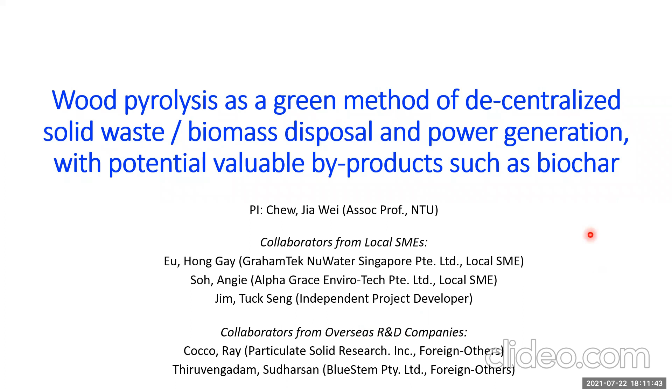The differentiating factor for this proposal is the local context that we are very aligned with. So Singapore aims at net zero emissions in a few decades, and the solutions that we develop have to be fully aligned with Singapore's unique context. The specific problem we are targeting that is unique to Singapore is solid waste disposal.

So Singapore is a very, very densely populated country. We generate 8,000 tons of solid waste daily. Of these, 40% is incinerated, and the incineration is to reduce the volume by 90% and also to generate power. The problem with such a method is that it gives substantial carbon emissions.

To circumvent that and to be aligned with the current grant call on low carbon emissions, we are targeting this specific problem of wood. So Singapore's green city status requires regular tree pruning, and this gives 1,000 tons of waste wood daily. So as a low carbon alternative to incineration, rather than incinerating this 1,000 tons of waste wood daily, we can pyrolyze these wood chips to generate decentralized power and biochar for agricultural use.

And why pyrolysis? Because it's the most economically viable compared to gasification, biochemical conversion, and various other means. This technology that we developed is also applicable to the substantial waste and sludges from the flourishing pharmaceutical industries in Singapore.

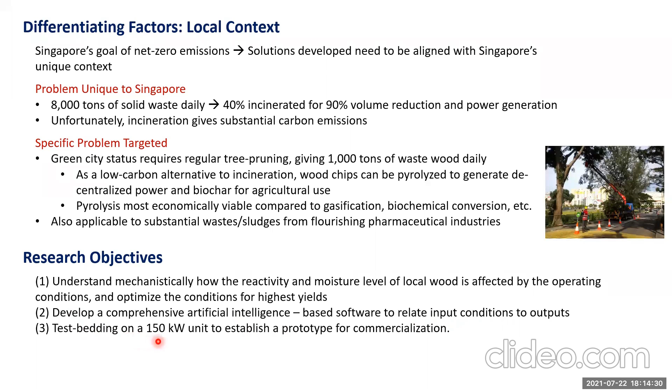accordingly. The third objective is to test bed this technology on a 150 kilowatt unit to establish a prototype for subsequent commercialization post-project. And how is this significant to the current grant call objective?

So Singapore is the world's third most densely populated country. So an efficient low carbon system for waste management is critical. The current method of waste to energy incineration results in substantial carbon emissions, so it's not sustainable. And to circumvent this, the reduction of the incinerated volume is necessary.

And part of this incinerated volume is this wood waste that is generated daily due to this regular tree pruning that we have to do to maintain our garden city status. This tree pruning gives 1,000 tons of solid waste daily. So what this project aims to do is to dispose of this solid wood waste by pyrolysis, and this not only reduces the solid waste that we have to feed into the incinerator, but it also generates decentralized power and also provides biochar for agricultural purposes.

So why pyrolysis? Pyrolysis might sound like an energetically expensive process, but it's been reported that 18% of the power generated is sufficient to satisfy the pyrolysis energy requirement, and the yield is very high. It's very attractive. For 1 ton of wood that we pyrolyze, we can get up to 300 kg of biochar.

And so compared to incineration, pyrolysis gives higher energy recovery efficiency, lower environmental pollutant emissions, and excellent flexibility for decentralized applications. And then compared to gasification and biochemical conversion, pyrolysis requires the lowest capital and operating costs.

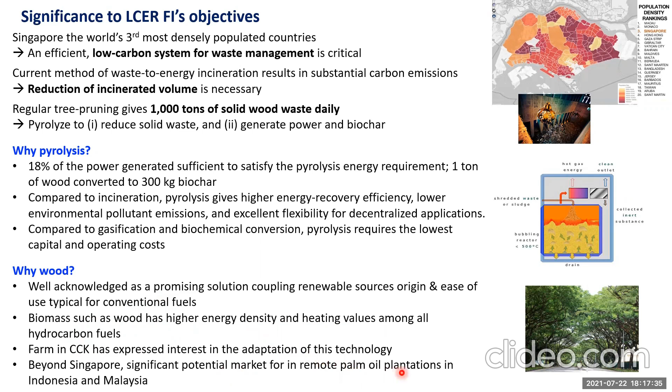And a farm in Choa Chu Kang has expressed interest in the adaptation of this technology. We'll elaborate more on this later on. And then beyond Singapore, in our neighboring countries, there's a significant potential market in the remote palm oil plantations in, for example, Indonesia and Malaysia.

So this is the plan for this proposed project. We are very aware that the need is to reduce the solid waste that we feed into the incinerators because this has a very high carbon footprint. And the solid waste that we are targeting in this proposed project is wood. This is a biomass, and this is a substantial constituent of the solid waste. But the economics of wood pyrolysis for valuable products remains poor. And so this is the challenge that we are resolving in this proposed project.

So under work package 1, we'll try to fundamentally and mechanistically understand via experiments and simulations how this wood pyrolysis process is. So we'll run experiments to try to understand the influence of various parameters. We'll characterize our local wood sources. And then for simulations, we'll carry out multi-scale simulations from the particle scale to the mesoscale to the reactor scale so that we can apply the knowledge gained to the commercial process.

Under work package 2, we aim to use artificial intelligence tools to improve the predictive capability of yield based on the inputs. So we know that the wood quality and variety may not be consistent on a daily basis. So we'll have to be able to troubleshoot and be able to predict how much power, how much biochar we are able to get out of the wood that we feed into the pyrolysis reactor.

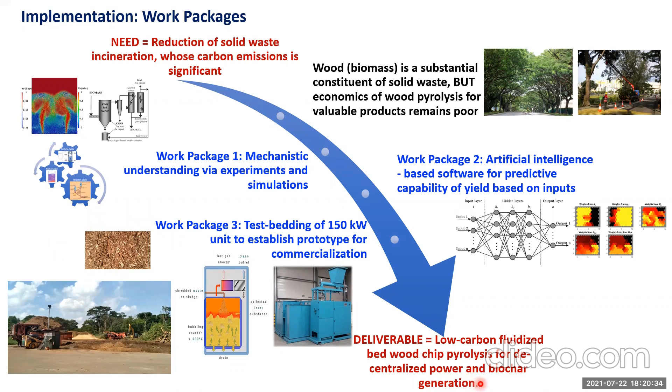So more specifically on the test bedding, a Choa Chu Kang farm, which is a contact of one of our collaborators, they've promised to supply us 30 tons per day of wood chips, and they will shred it down for us so that it's easier to feed into our pilot setup. And they've also offered to give us the land space, roughly about 4 of these 40-footer containers, so that we can house this pilot scale reactor that a Belgian contractor will build for us.

So this pilot unit will comprise of a fluidised bed furnace and associated blower machinery, secondary combustion chamber and boiler unit, flue gas cleaning plant and fan, turbine generator unit and condenser, and electrical switch gear and load bank. So this is a general overview of the test bedding that we will be investing a sizable amount of this budget in. So this is the shredding of the chips at this Choa Chu Kang farm.

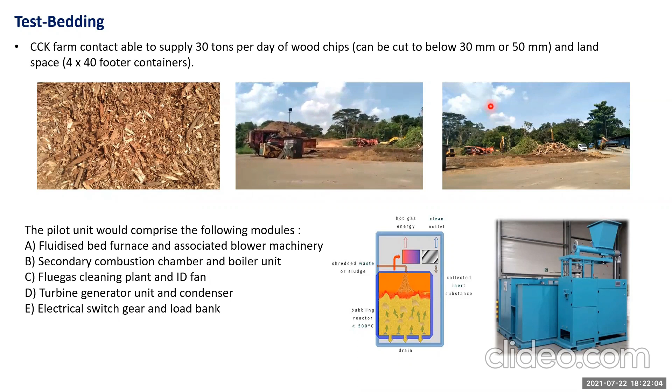In terms of deliverables, midterm, we aim to get insights into the different mechanisms of wood pyrolysis. There are various mutually interacting processes. We will try to identify the influence of various parameters so that we know which are the most dominant ones to control. And we also seek a fundamental understanding of these processes, which will contribute towards the design of a high-efficiency system. We also aim at designing and scaling up the optimized high-yield fluidized bed pyrolyzer.

We will study the hydrodynamics systematically, and then we'll optimize the design parameters. So the lab scale model will lay the foundation for the development of the pilot scale and for future commercialization. And then thirdly, the software based on artificial intelligence tools, which is a user interface in future when we commercialize this reactor. So this software will allow for the prediction of yield based on the specific inputs, knowing that the wood properties will change potentially on a daily or even hourly basis.

At completion, we aim to have a technology for future scale-up and other applications. Other applications, for example, coal gasification, solid waste gasification, as well as treatment of pharmaceutical waste, knowing that the pharmaceutical industry is a dominant industry in Singapore and waste disposal costs have skyrocketed recently. And also manpower and intellectual property development.

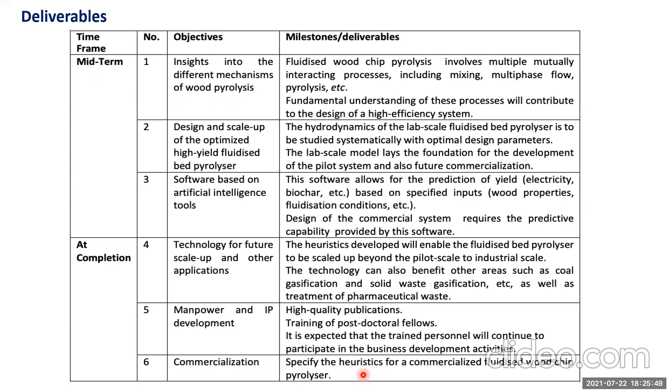So this project is based off a very strong team with a combined experience of more than a century. I'm from an IHL, from NTU. We have 2 overseas R&D companies and 3 local SMEs. All of us have collaborated and interacted at some point, so we are not strangers to one another. So my name is Chew Jia Wei. I'm from NTU. I have 15 years of research experience in process understanding and design.

Ray Cocco is from the US. He helms this research company. He has more than 30 years of experience in multi-phase flow. Sudharsan Thiru is a co-founder of Bluestem Private Limited in Australia. He's an expert in applying AI to model and analyze complex processes such as this.

Hong Gay helms GrahamTek NuWater. He has more than 50 years of experience in implementing engineering innovations. He was one of the pioneers in the incineration scene in Singapore in the late 70s. And he also developed a fluidised bed toxic waste plant in Jurong Island with Sembcorp in 2000.

Tuck Seng is an independent project developer with more than 30 years of engineering experience. He co-developed a biomass plant to convert wood chips from NParks waste into biochar. Angie is from Alpha Grace Envirotech. She has more than 20 years of experience in waste treatment. Specifically, this company, of which she's a director, develops decentralized incinerators of 1 ton per day and 5 tons per day capacity. The waste material processed ranges from domestic waste to biomedical waste.

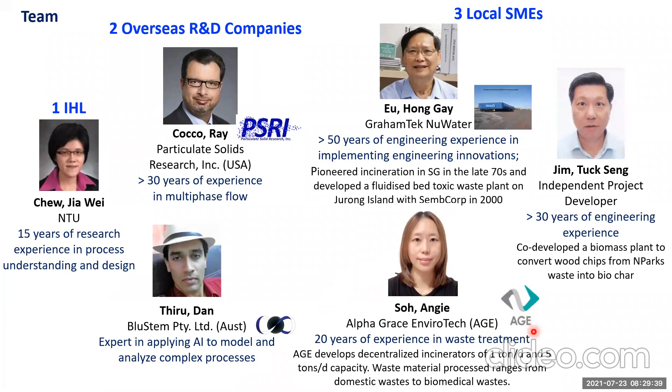In the following, we'll look at a video that showcases the expertise of Hong Gay in bringing this project further into the commercialization phase after the end of this project. And we'll also look at a video that showcases AGE's capabilities and innovations in waste treatment.